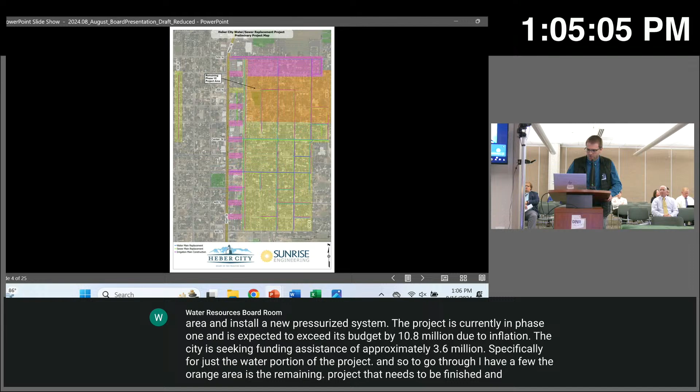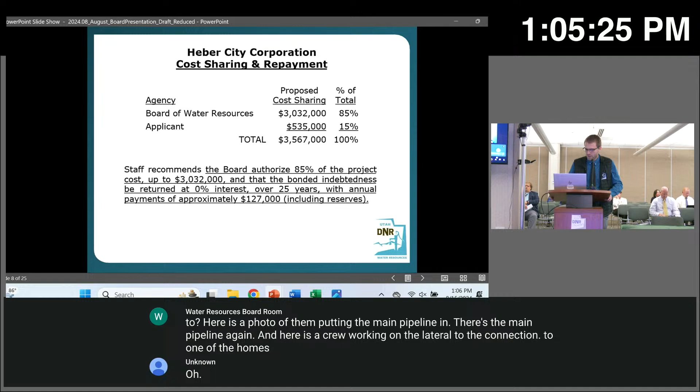And so the staff recommends the board authorize 85% of the project cost, up to $3,032,000, and that the bonded indebtedness be returned at 0% interest over 25 years with annual payments of approximately $127,000, including reserves. That is staff's report.

Does the applicant wish to add anything to the presentation? No, I don't believe so, I think I covered all of it. Yeah, we just had, due to inflation during COVID and the supply chain issues, it kind of drove our project costs up higher than anticipated than what our original funding package had funds for. And so we're just trying to seek out some additional funding to complete the project in its original scope.

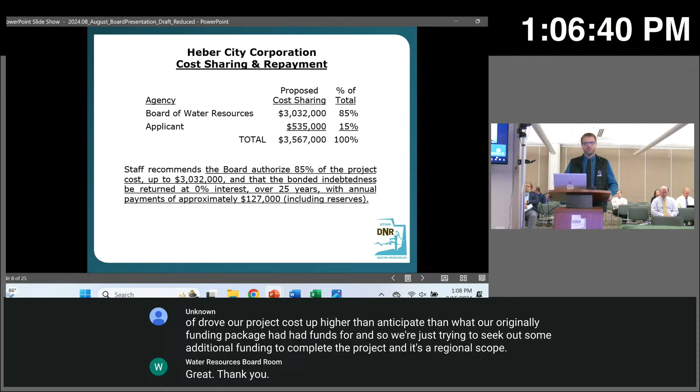Great, thank you. Is there any questions from the board then? Seeing none, I'll look for a motion. Mr. Chairman, I move that the board authorize 85% of the project cost up to $3,032,000, and that the bonded indebtedness be returned at 0% interest over 25 years with annual payments of approximately $127,000, including reserves. We have a motion, is there a second? Dana, thank you. All in favor? Aye. Any opposed? Passes unanimously. Thank you.

Okay, moving down, we move into committal of funds. RC 068, Twin Creeks Special Service District, Lindsay Reservoir. Good afternoon, board members. Max, do we have Max Covey online? I am, I'm here. Welcome. Thank you. All right, so for Twin Creeks Special Service District, in relation to Bennett Lindsay Dam, or Lindsay Dam.

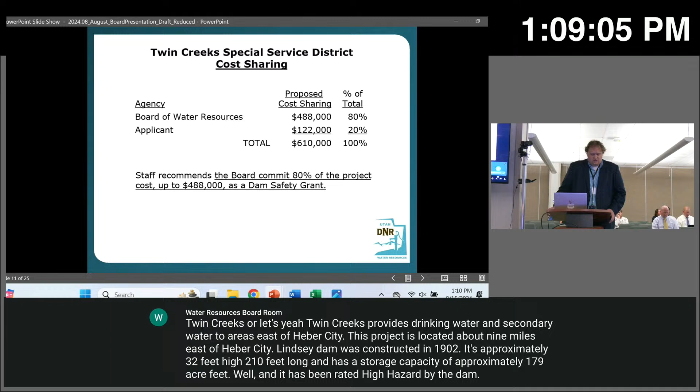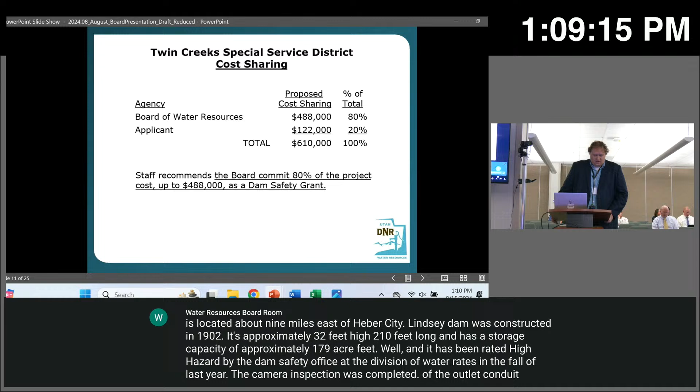In the fall of last year, a camera inspection was completed of the outlet conduit, which indicated integrity issues with the outlet that need urgent repair. The Office of Dam Safety agreed to allow the district to store water during the winter to use this year, as long as the district agrees to fix it.

There are 3 sections that have been added over the years. They're all 10-inch. One is a concrete pipe with extensive cracking and a deformed oval shape, which is of maybe greatest concern. Then there's some box structure and some CMP.

The proposed project includes replacing that by excavating 4,000 cubic yards and then installing a 24-inch concrete encased HDPE pipe. A new sluice control gate will also be installed, as well as an outlet structure with a trash rack.

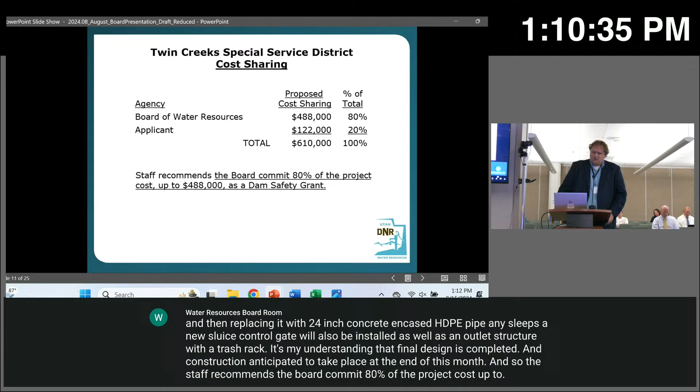It's my understanding that final design is completed and construction is anticipated to take place at the end of this month. Staff recommends the board commit 80% of the project cost, up to $488,000, as a dam safety grant. That is staff's report.

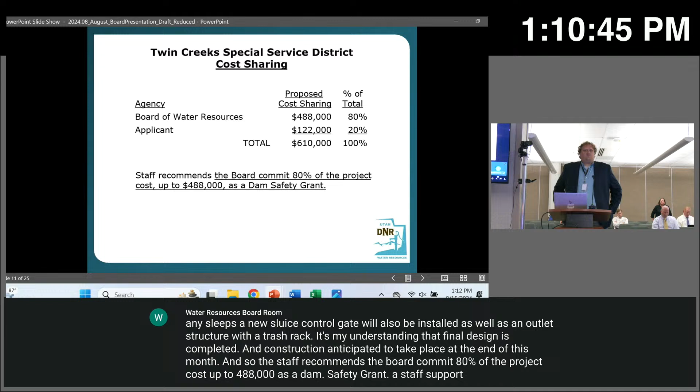Thank you, Ethan. Does the applicant wish to add anything to the presentation?

Thank you, Mike. I'd like to jump in and express my appreciation to Dam Safety and Egbert, and Matt and his group, and Ethan and Tom, for helping me push this through. This is of great importance, as mentioned earlier, as this is the culinary and secondary supply for a lot of our customers in this area. Getting this repaired this season to store water this winter for next year's use is very critical. Other than that, I just appreciate your time.

Thank you. Are there any questions from the board? Max, I do have a question. This is a grant, so you'll be required to provide 20%. How are you providing that—through reserves, rates, or participants? That's going to come from our reserve repair and replacement fund. Roughly about $122,000 is what we're anticipating, and we do have that budgeted and available for use on this project. Okay, great. Thank you.

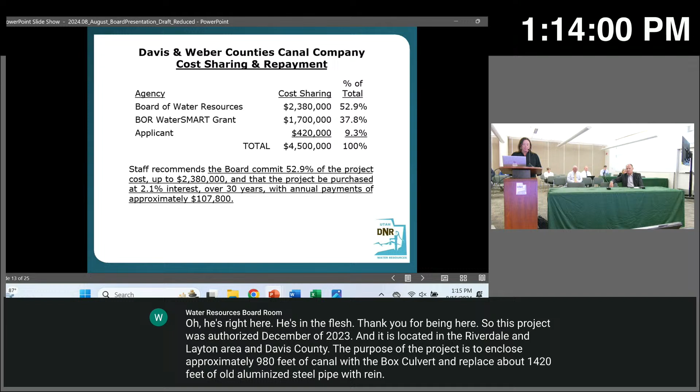It is anticipated that construction will start after the irrigation season ends in October. Staff recommends the board commit 52.9% of the project cost, up to $2,380,000, and that the project be purchased at 2.1% interest over 30 years with annual payments of approximately $107,800. That is staff's report.

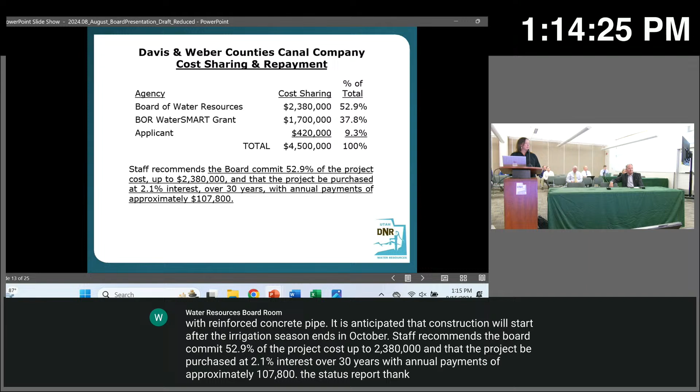Thank you. Scott, do you have anything to add to the presentation? I'm not sure what to add, other than positive things—generally, yes, help. Totally.

We really appreciate the board and the Division of Water Resources helping on, I don't know how many projects it's been with Davis and Weber County's Canal, but it's been dozens, at least. I know you've held the water rights for the company for probably several decades because of the many loans we've gotten from the division. We just appreciate the ongoing support. This is just another great project in a series of projects we still have to do to improve the canal, which is really the lifeblood of the company. So appreciate it. Thank you.

Thank you. Are there any questions of the board?

Kyle? Not a question, Mr. Chairman, but just a comment—it's good to see Scott here today. We generally see Rick, I think. Right, but he's at a wedding, a family wedding, I believe, today, so he has a legitimate excuse for not being here. But yeah, this is just another part of your ongoing capital improvements project list that you're working on. Yes, definitely it is. Thank you.

If there are no further questions, I'm looking for a motion. Mr. Chairman, again, Kyle Stevens, I'll make that motion: that the board commit 52.9% of the project cost, up to $2,380,000, and that the project be purchased at 2.1% interest over 30 years with annual payments of approximately $107,800.

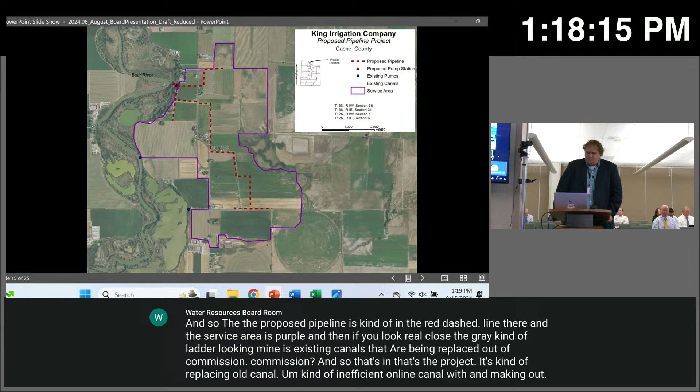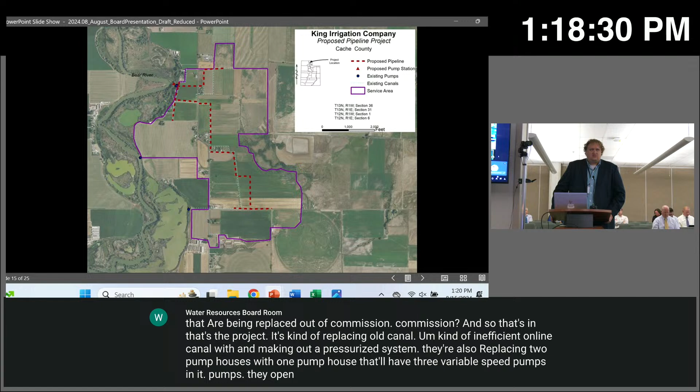They're also replacing 2 pump houses with 1 pump house that'll have 3 variable speed pumps in it. They opened bids this morning, and they're looking for a contractor, hoping to get started as soon as they can.

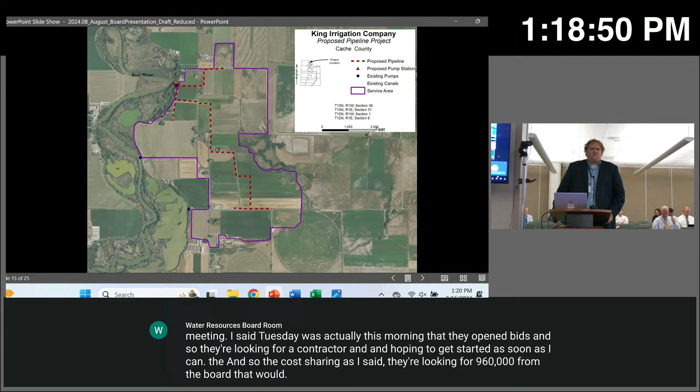The cost sharing: they're looking for $960,000 from the board. That would be 28.4% of the total project cost. The board previously authorized 28.4% of the project, up to $960,000, to be purchased at 0% interest over approximately 18 years.

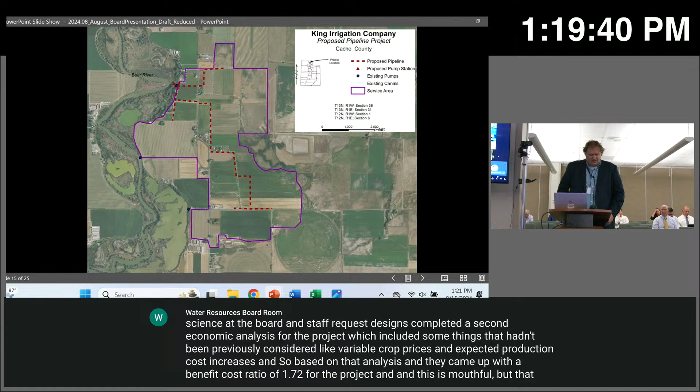But then at the board and staff request, Zions completed a second economic analysis for the project, which included some things that hadn't been previously considered, like variable crop prices and expected production cost increases. Based on that analysis, they came up with a benefit cost ratio of 1.72 for the project, and an estimated annual net increased crop income of $367,000. From that, figuring in some of their other costs, we figured a net annual benefit of $86,500, and that times the board cost share put them at a payment that would take too long to repay based on this fund. So we gave them the maximum amount of years we could, at 25 years.

So there's the cost sharing with the $1 million WaterSMART grant and the $1.25 million UDAF grant, and then the board cost share and the applicant's 5% share. That leads me to the staff recommendation: staff recommends that the board commit 28.4% of the project cost, up to $960,000, and that the project be purchased at 0% interest over 25 years with annual payments of approximately $38,400. That is staff's report.

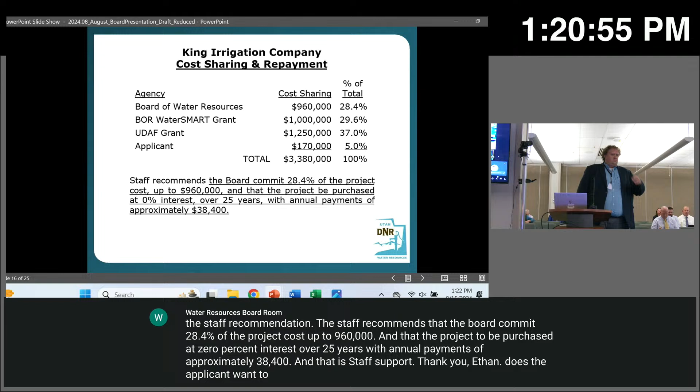Thank you, Ethan. Does the applicant want to add anything to the presentation? I think that sounds good. Very good. Are there any questions from the board?

Mr. Chairman, a question. Could you bring the picture of the map back up? It looks like the existing pump stations were just on the outside edges of the service area—one here, and one here—but a new one. So will the existing pump stations be replaced with the new pump station, or will the other ones that are still there still be used? Yes, those pump stations will be completely demoed and replaced with the new upgraded pump station.

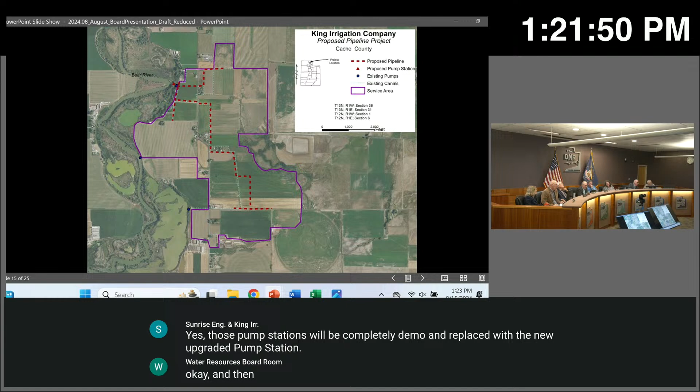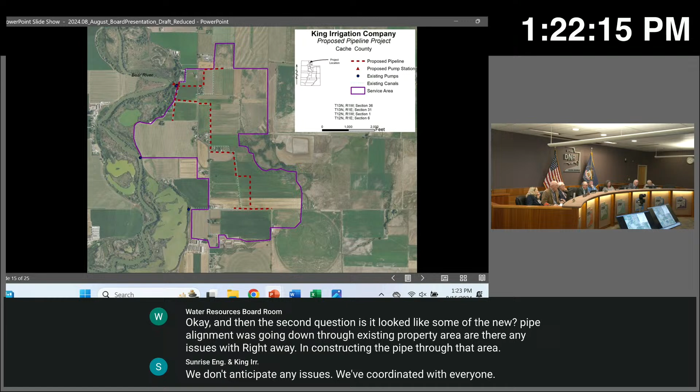Okay, and then the second question: it looked like some of the new pipe alignment was going down through existing property area. Are there any issues with right-of-way in constructing a pipe through that area? We don't anticipate any issues. We've coordinated with everyone, and we're working. All the property owners are the farmers who will actually benefit from this project, so they're all very excited for this project. Okay, thank you.

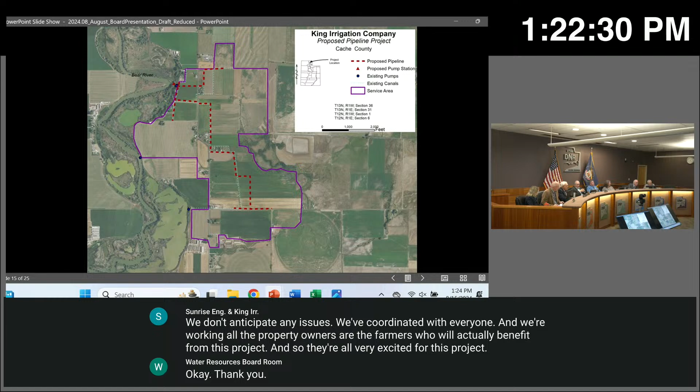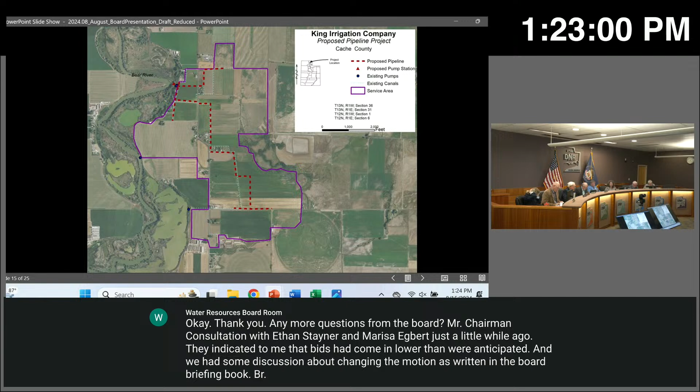Any more questions from the board? Mr. Chairman, in consultation with Ethan Stayner and Marisa Egbert just a little while ago, they indicated to me that bids had come in lower than anticipated, and we had some discussion about changing the motion as written in the board briefing book. What we decided is I will read the motion as stated, and then when the project is completed, we can adjust the amounts down, not up. If the project participants want to do other work—at least what we've done in the past—if there are additional funds at the end, you might want to adjust some of your project within the upper limits of that amount of money. But for today, I will read the motion to not reflect these lower bids you received today, but what the board book describes.

Very good, then we're looking for a motion. Mr. Chairman, I will make the motion that the board commit 28.4% of the project cost up to $960,000, and that the project be purchased at 0% interest over 25 years with annual payments of approximately $38,400.

Thank you for your motion. Is there a second? I'll second it. Seconded by Kyle. All those in favor of the motion? Aye. Any opposed? Motion carries. Thank you very much. Thank you, Ethan, and thank you, applicants, for being here.

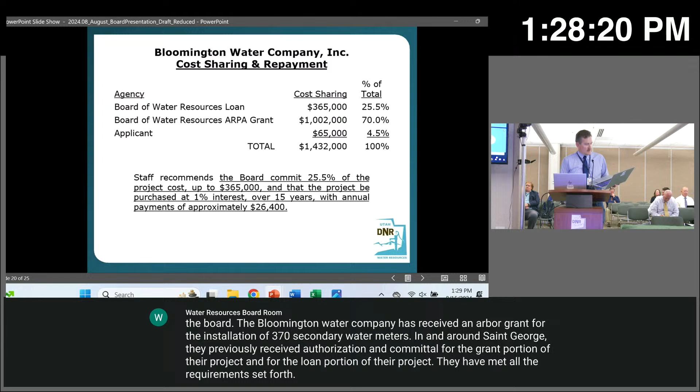Staff recommends that the board commit 25.5% of the project cost up to $365,000, and that the project be purchased at 1% interest over 15 years with annual payments of approximately $26,400. And that's staff's report.

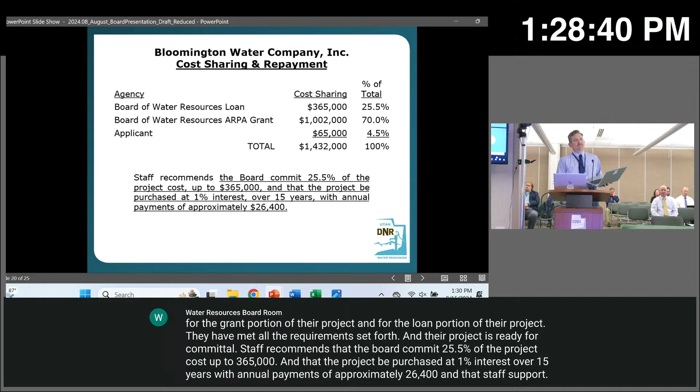Thank you. Are there any questions from the board? Seeing none, we'd entertain a motion. Mr. Chairman, Spencer Jones would like to make a motion that the board commit 25.5% of the project cost up to $365,000, and that the project be purchased at 1% interest over 15 years with annual payments of approximately $26,400. Thank you for the motion. Second by Randy. All in favor? Aye. Any opposed? Motion carries. Thank you all. Thank you, Ben.

Now we will move into special items. Ben can stay here. RM 100, Saratoga Springs City, change of scope, and we have Owen Jackson and Mark Atencio. Apologize. Thank you for being here. Okay, Ben, go ahead.

The city of Saratoga Springs came before the board in June 2023, and at that time they received authorization and committal of funds for a project to install some pipeline and to do some landscape conversion from turf grass to waterwise landscaping. They've been pursuing that project since then. However, the project became impossible due to issues with obtaining the necessary rights-of-way. And they are coming before the board today to propose an adjusted scope to their project.

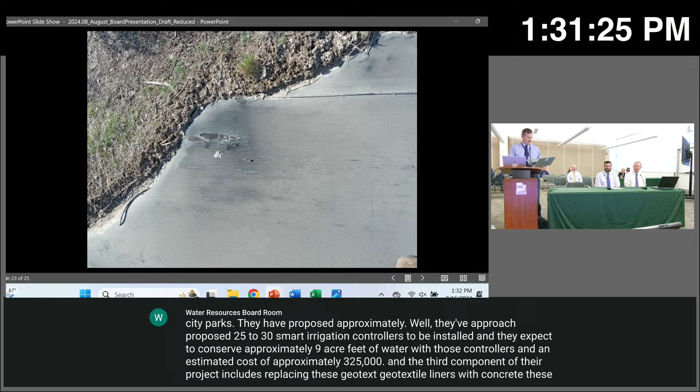They expect to conserve approximately 9 acre feet of water with those controllers at an estimated cost of approximately $325,000. The third component of their project includes replacing these geotextile liners with concrete. These are located in a couple of city ponds, and they are in a state of failure and need to be replaced. But because of the scheduling of the funding and the project, there has not been a percolation study done, so there's no estimate on water conservation here.

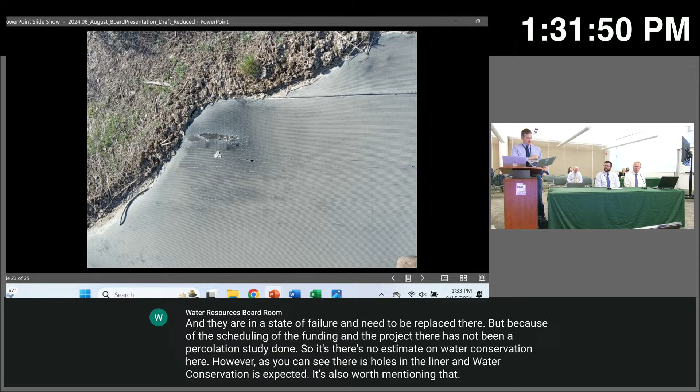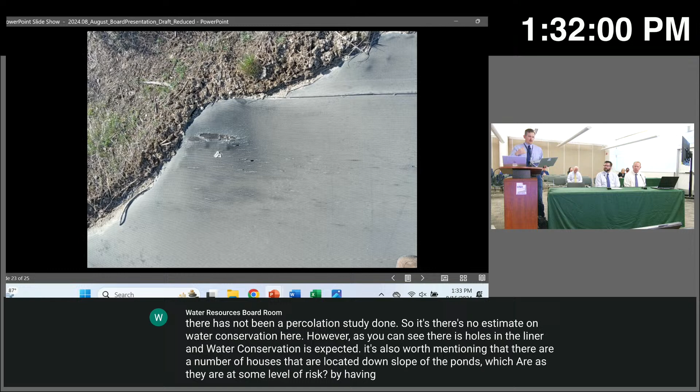However, as you can see, there are holes in the liner and water conservation is expected. It's also worth mentioning that there are a number of houses located downslope of the ponds, which are at some level of risk from water leaking through the liner. This piece of the project is expected to cost approximately $1.3 million.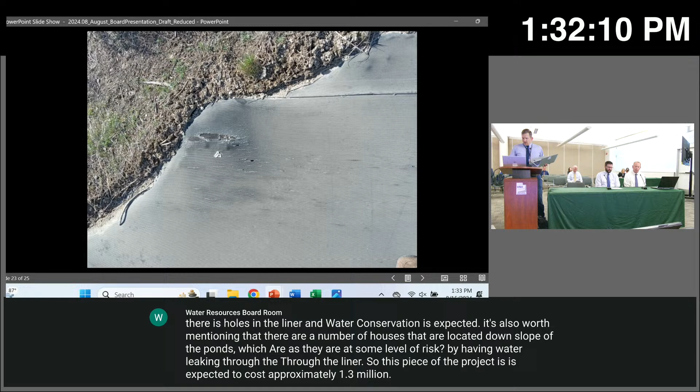And a couple more photos for your viewing pleasure, which I think we've already seen once today.

This project is slated to receive about $2 million, a separate portion of the ARPA funding, for 4 systems that were fully metered previous to May 4th, 2022. The total expected project cost is $2,626,000. Staff recommends that the board approve the change in project scope and allow the $2 million water conservation grant to be used for the new projects as requested by the applicant. That is staff's report.

Thank you, Ben. Does the applicant want to add anything to the presentation?

Just appreciate the board considering this matter and helping us do some water conservation additionally in our city. It'll be nice to get some of these ponds fixed and stop the seepage from happening, as well as the landscaping, and set a good example for our residents as well. So thank you.

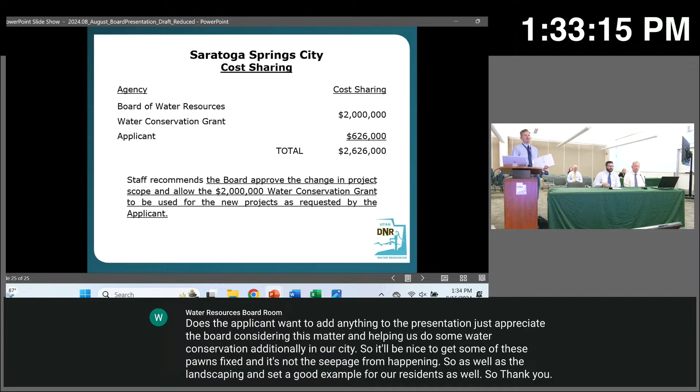Does the board have any questions for the applicant or from Ben? Kyle, I'll ask a couple there. Ben, from some of the earlier pictures you showed us of the pond liners, they were deteriorating. How long have those been in, and what was the life expectancy on those?

They've been installed for 15 to 20 years. The life expectancy is 20 years. These two are the first ponds constructed in the city. We no longer use this method. We found that they capture a lot of thermal energy, which leads to the growth of algae and water quality problems in our system, so there will be a number of benefits by replacing these.

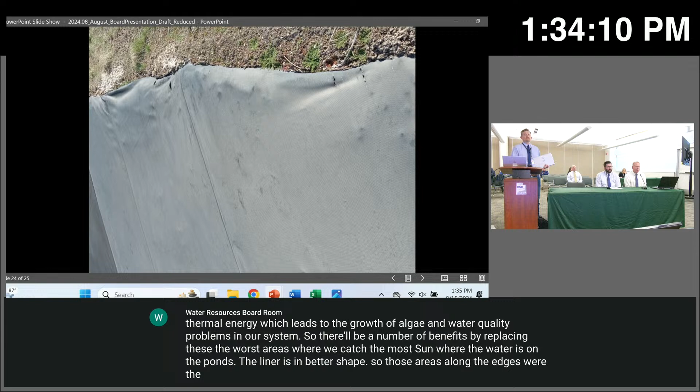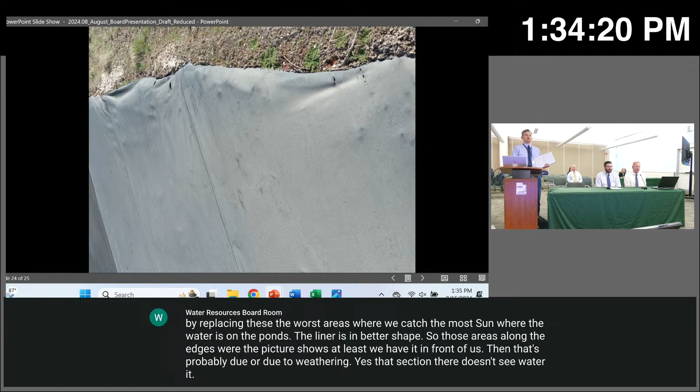The worst areas are where we catch the most sun. Where the water is on the ponds, the liner is in better shape. Those areas along the edges shown in the picture are probably due to weathering and sun exposure -- that section doesn't see water, it catches the sun. It's facing west. Okay, thank you.

Any further questions? Seeing none, looking for a motion. Mr. Chairman, I move that the board approve the change in project scope and allow the $2 million water conservation grant to be used for the new projects as requested by the applicant. Thank you, we have a motion. Brian is a second. All in favor? Aye. Aye. Any opposed? Motion carries. Thank you very much, thanks for coming to the meeting. Appreciate having you here. Thank you, Ben.

Okay, next in line we have some withdrawals. Is Marisa going to do this? Who's going to present these? I don't think so -- we've already been over these, so we know them.

Do we have a motion to withdraw RL 587 Millville City and RM 099 Ashley Central Irrigation Company? Mr. Chairman, I will move on RL 587 that the project be withdrawn from further consideration by the board. Second. We have a motion and a second. All in favor? Aye. Aye. Any opposed? Motion carries.

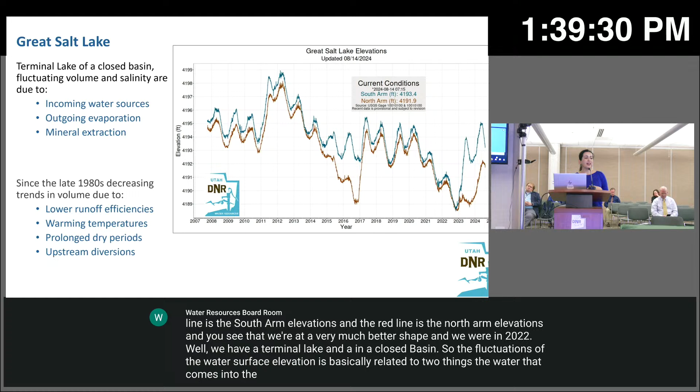We have a terminal lake in a closed basin, so the fluctuations of the water surface elevation are basically related to two things: the water that comes into the lake and the water that goes out. The water that goes out is mostly evaporation, and the other part is some diversions for mineral extraction.

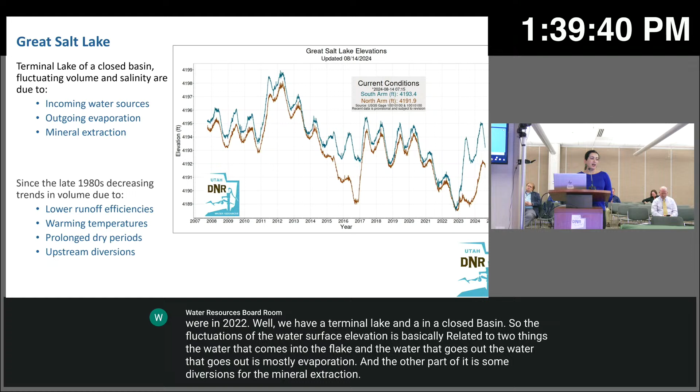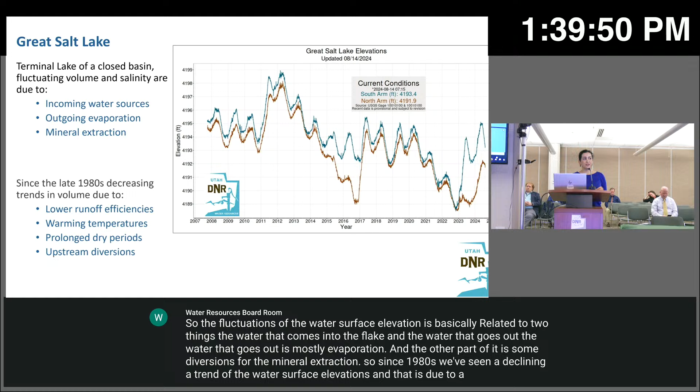Since the 1980s, we've seen a declining trend of the water surface elevations, and that is due to a combination of different factors such as lower runoff efficiencies, warming temperatures, prolonged dry periods, and upstream diversions. All of these affect the fluctuations of water surface that you see here.

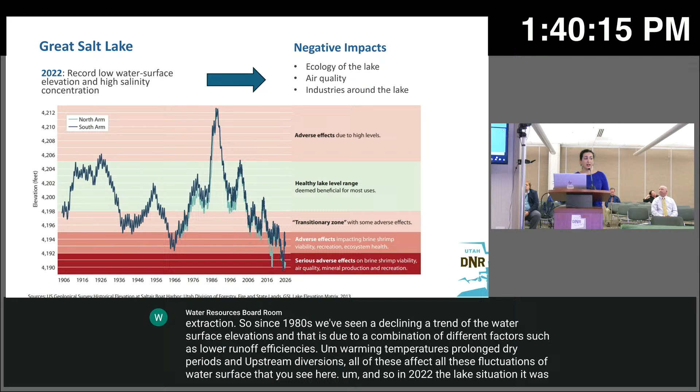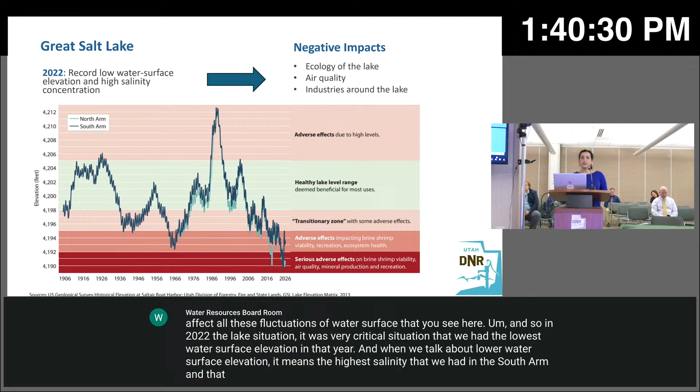In 2022, the lake situation was very critical. We had the lowest water surface elevation that year. And when we talk about lower water surface elevation, it means the highest salinity that we had in the south arm. Both of those factors affect the ecology of the lake, the air quality, and the industries around the lake, all with very negative impacts.

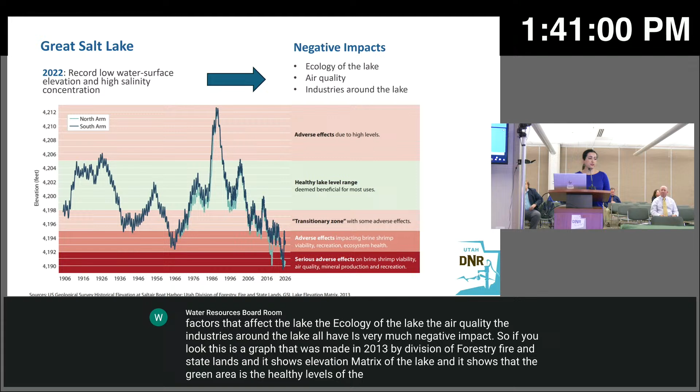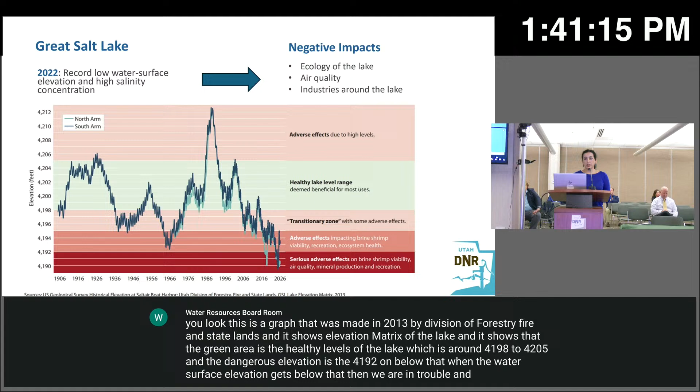This is a graph made in 2013 by the Division of Forestry, Fire, and State Lands, and it shows an elevation matrix of the lake. The green area is the healthy levels of the lake, which is around 4198 to 4205. The dangerous elevation is 4192 and below. When the water surface elevation gets below that, then we are in trouble, and the brine shrimp industry, the mineral companies, air quality—a lot of issues rise up.

Now we want to look at this at a bigger scale. In the Great Salt Lake Basin, the water that comes into the basin and is used by the users, both agriculture and municipal, and the lake, we all share the same water resource, and it starts up in the mountains. When the snowpacks melt, it goes into the groundwater and the rivers, gets to the basin, gets used by the water right holders and different users, and then whatever is left gets to the lake.

Here we want to mention the major inflows to the lake. There are three big rivers that go into the lake: Bear River, Weber River, and Jordan River, with Bear River around 41%, Jordan River around 14%, and Weber 9%. The other biggest inflow to the lake is direct precipitation, which is around 32%.

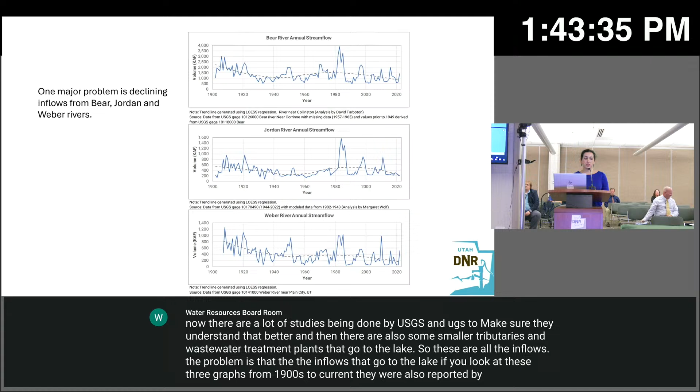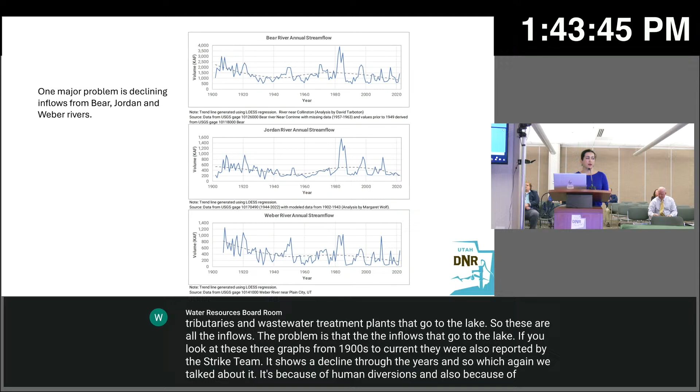It shows a decline through the years, and as we talked about, it's because of human diversions and also because of the trends of climate and climate factors.

Since the beginning of the 1990s, we've had this water budget model that was developed by the Division of Water Resources in order to better understand the water balance in the state, and we've been improving this model along the years. This is a model that is on an annual basis.

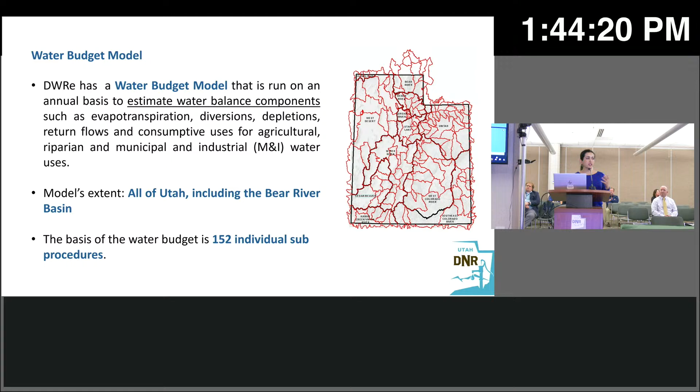It considers estimates of different water balance components such as evapotranspiration, consumptive use, diversions, depletions, return flows for different users. It does this based on getting an extensive amount of input data from all different sources, such as Division of Water Rights, USGS, USBR, and all other places where there is water data available for the state.

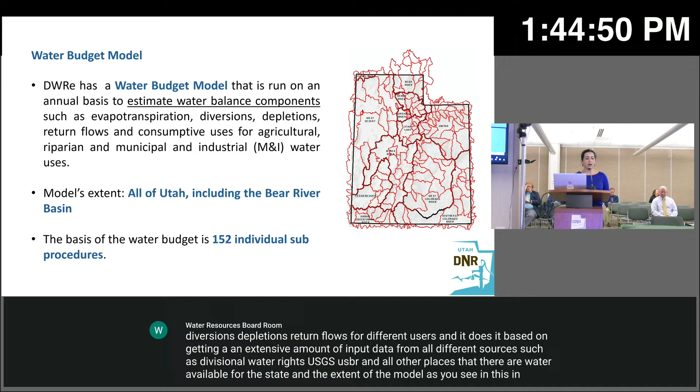The extent of the model, as you see in this map, covers the whole state as well as the Bear River Basin. The way it does it, it divides the state into 152 sub-areas, and it has a specific procedure and code for each sub-basin because each sub-basin is different. Then it does the calculations.

On average, the evaporation is estimated to be around 2.2 million acre-feet from the Great Salt Lake itself, and that's a big number. If you look at all the different numbers and depletions that we see in this basin, 2 million is a big number.

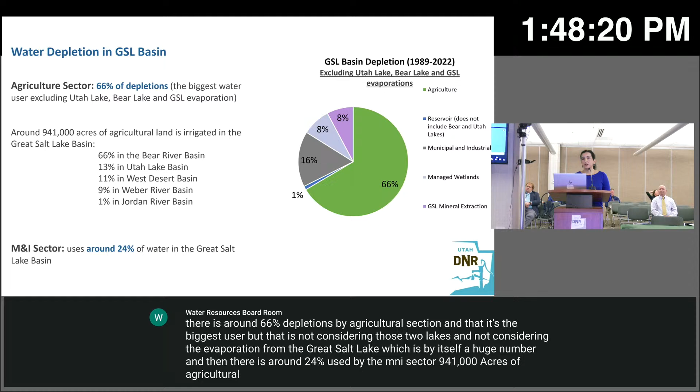And then there is around 24% used by the M&I sector. There's 941,000 acres of agricultural area, and most of it is in the Bear River area, of course.

We know there are a lot of different challenges we have, and no one solution can fix this. We are all in this together. It's a big basin, it has a lot of different users, and one of them is the Great Salt Lake. It can be done only by collaboration, continued innovations, and with all the stakeholders involved.

There have already been a lot of significant steps, research and work done during recent years, and it's ongoing. I'll just mention three of these here. One is the Great Salt Lake Strategic Plan developed by the Great Salt Lake Commissioner's Office to provide a coordinated path forward for the Great Salt Lake.

And then there is the Great Salt Lake Basin Integrated Plan that you've heard before from our team here at the Division of Water Resources. We are working on this currently. It's significant modeling work in collaboration with different federal and state agencies and other stakeholders, and it's supposed to help us improve the models we have, because the models are only good if we have great input data. If not, it's not as accurate.

And we know there are gaps in our understanding and in the models that we have. And the only way to fill those gaps and make it better, and make us understand this system better, is through this modeling effort that we're doing.

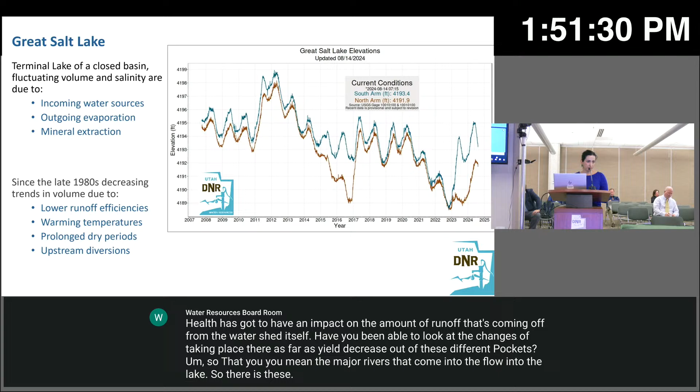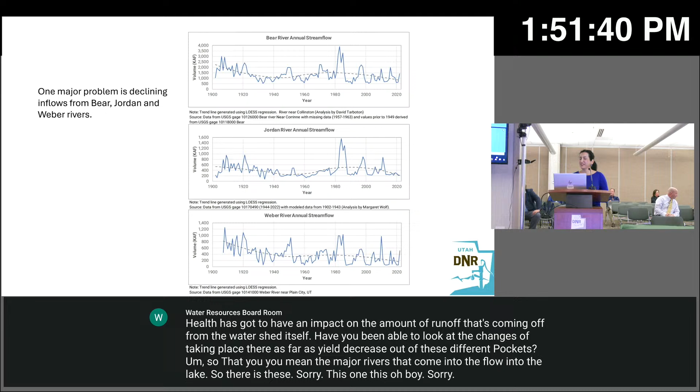You mean the major rivers that come into the main lake, watershed? So there is these... sorry... this one, oh boy, sorry, this one. That shows the three major rivers, and it already shows that all the runoff that comes, it's decreasing from the 1900s to now.

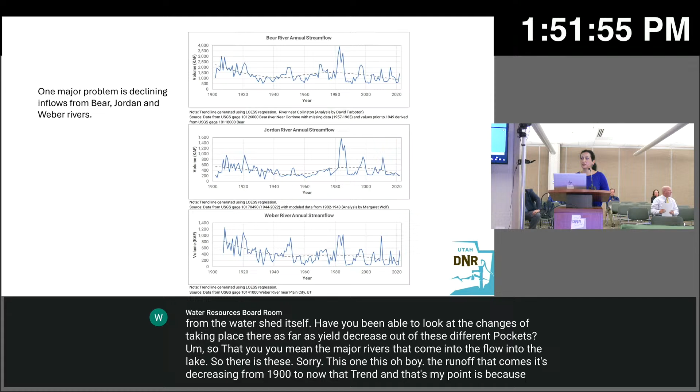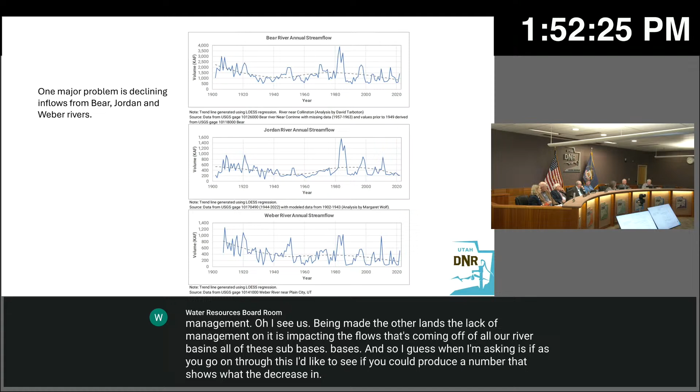The trend - and that's my point, is because of the lack of watershed management. Oh, I see - forests being managed, the other lands, the lack of management on it is impacting the flows that's coming off of all our river basins, all of these sub-basins. And so I guess what I'm asking is, as you go on through this, I'd like to see if you could produce a number that shows what the decrease in those yields from these different sub-basins is due to the lack of watershed management.

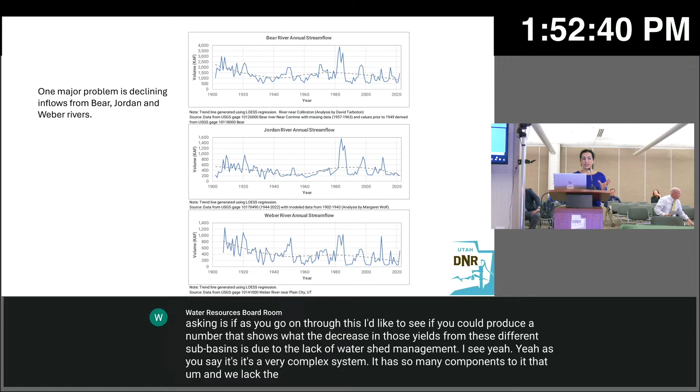I see. Yeah, as you say, it's a very complex system. It has so many components to it, and we lack the understanding of some of these and how it impacts the whole system. Hopefully in the next few years we're going to have much better understanding of what happens and why. So yeah, I appreciate your input on this.

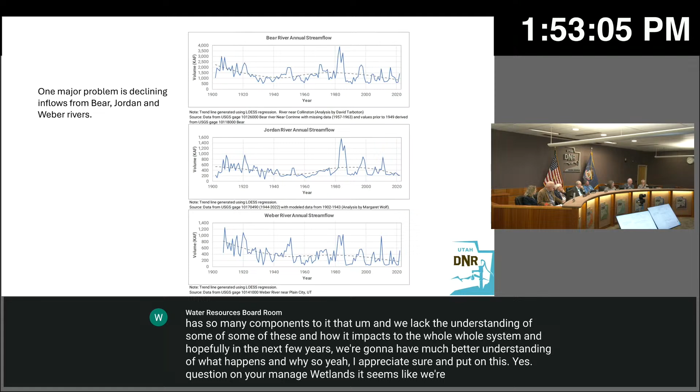Yes. Can I ask a question on your managed wetlands? It seems like we're in different places. One of the graphs you presented shows the different uses, shows managed wetlands overtaking municipal and industrial. I don't see that in your riparian description on that graph. What's the difference there?

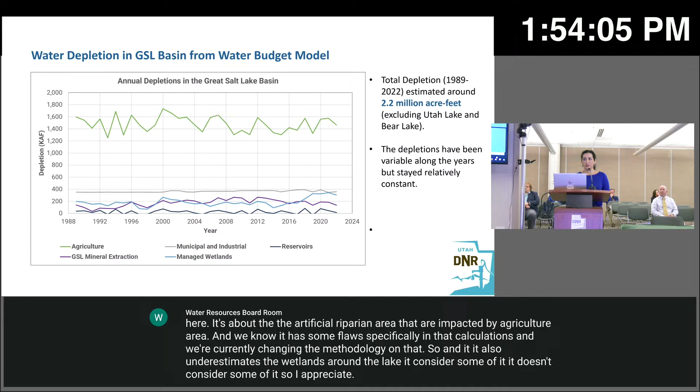It is from the same data, but just keep in mind that this riparian or managed wetlands here, it's about the artificial riparian area that are impacted by agricultural area. And we know it has some flaws, specifically in that calculation, and we're currently changing the methodology on that. It also underestimates the wetlands around the lake - it considers some of it, it doesn't consider some of it, so. No, I appreciate that, I just noticed some of those things. No, of course, yeah, but yeah.

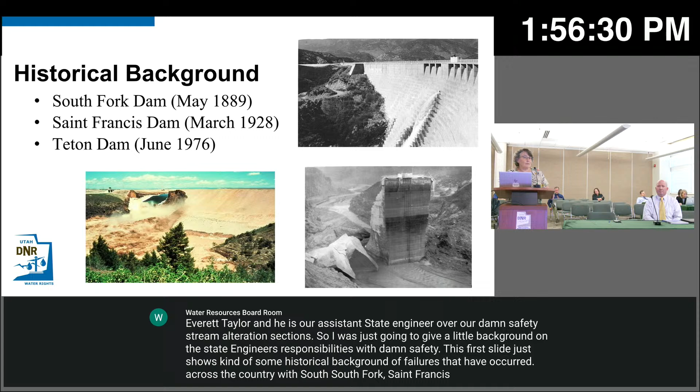So I was just gonna give a little background on the State Engineer's responsibilities with dam safety. This first slide shows some historical background of failures that have occurred across the country with South Fork, St. Francis, and the Teton Dams. I'm one of those old enough to remember these, so I've been around a little while.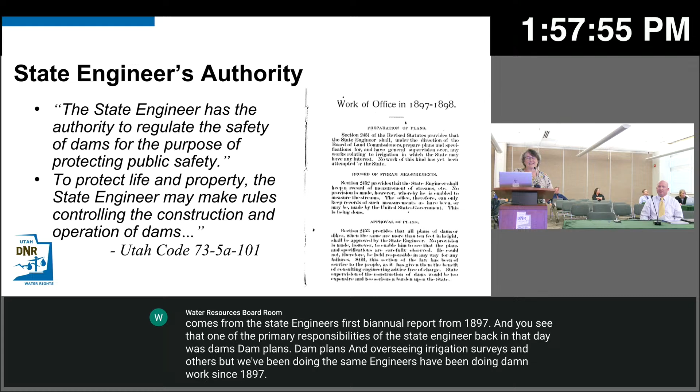You see that one of the primary responsibilities of the state engineer back in that day was dam plans, and overseeing irrigation surveys and others. The state engineers have been doing dam work since 1897. I love saying that. Anyway, with the state engineer's authority, I'm gonna turn it over to Everett to talk about the current program that we do today. So Everett.

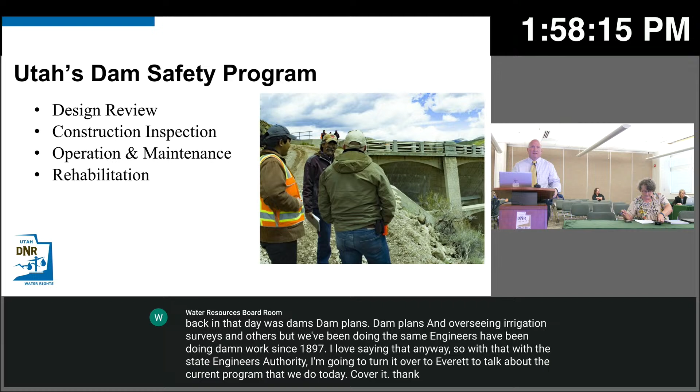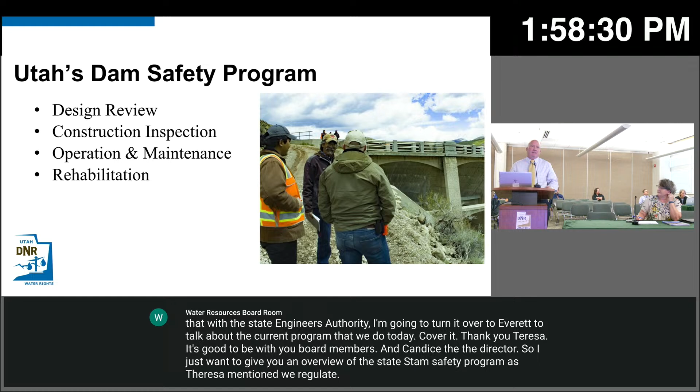Thank you, Teresa. It's good to be with you, board members, and Candice, the director. I just want to give you an overview of the state's dam safety program. As Teresa mentioned, we regulate dam safety in the state of Utah to protect downstream life and property. To accomplish that, we focus on four areas. I want to talk about each of them briefly.

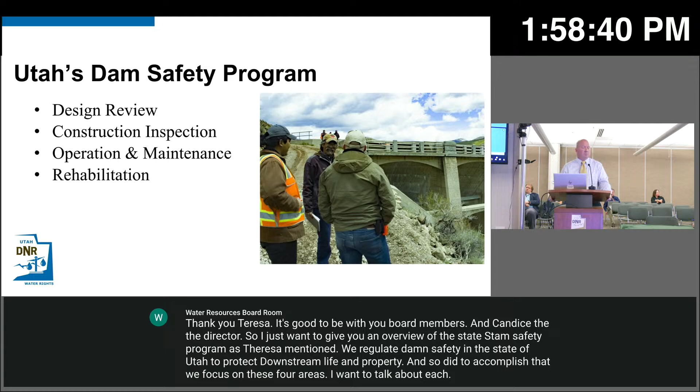The first is design of dams. Utah Code 73-5A-201 requires that no person may construct, enlarge, repair, alter, remove, or abandon any dam without first obtaining approval from the state engineer. Whenever a dam is to be constructed, or if an existing dam is going to be modified or repaired, the owner or their engineer needs to submit plans to our office for review and approval. Typically, these documents will consist of any design reports created, a set of design drawings, and technical specifications. We're given 90 days to review those and then issue comment back to the engineer or owner.

Once those comments have been addressed to the satisfaction of the state engineer, we will then issue an approval for that project. Once they've received approval from our office and obtained any other necessary approvals, they can move to construction. Utah Code 73-5A-301 instructs the state engineer's office to make periodic inspections of the work to ensure it's in compliance with the approved drawings and specifications.

So we perform routine construction inspections, doing those at least monthly for all ongoing construction projects, and more frequently if warranted. There are 3 formal inspections stated in our approvals: a foundation inspection, once the foundation has been cleared and prepared to receive fill, to ensure it's ready; then we inspect the outlet conduits prior to any concrete encasement and backfilling; and we complete a final inspection when construction is completed. We also monitor the dams through the initial filling of the reservoir to make sure they function as designed, and that any issues are addressed.

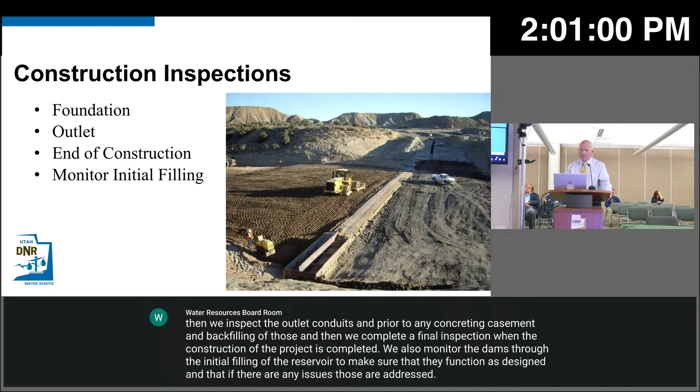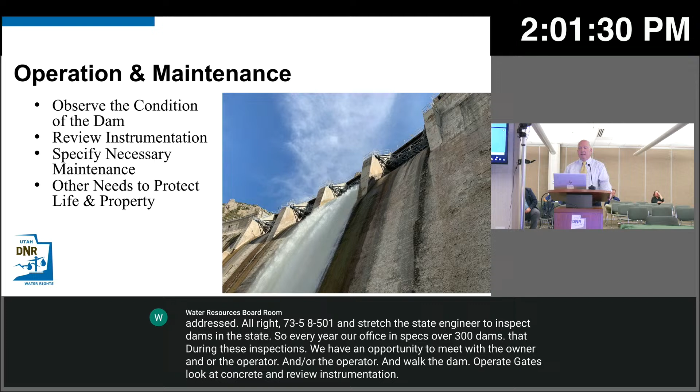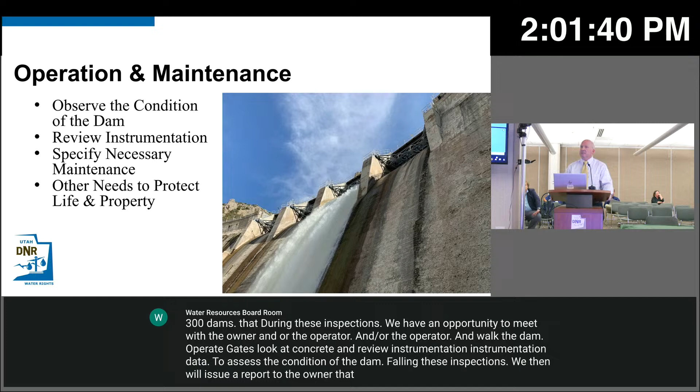73-5A-501 instructs the state engineer to inspect dams in the state. So every year our office inspects over 300 dams. During these inspections, we meet with the owner and or operator, walk the dam, operate gates, look at concrete, and review instrumentation data to assess the condition of the dam. Following these inspections, we issue a report to the owner that identifies necessary maintenance for them to complete prior to the next inspection.

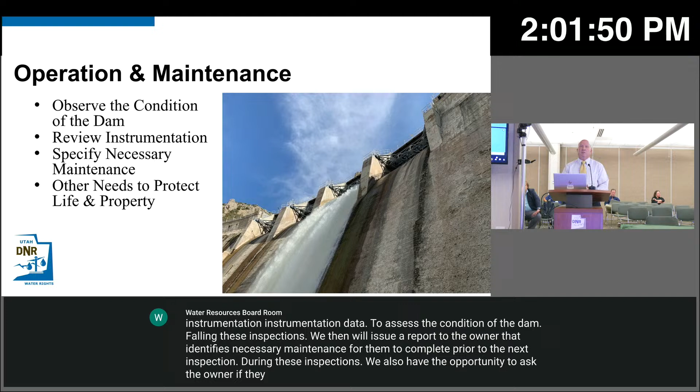During these inspections, we also have the opportunity to ask the owner if they've reviewed their emergency action plans, and then request any updates be made to those plans and copies of the revisions sent to interested parties.

This is really the part you may be most interested in as you make motions and decisions on these. When the law was amended in 1991, the legislature recognized the need to rehabilitate existing dams and provided a grant program to help rehabilitate high hazard dams in the state, outlined in 73-5A-502. The state engineer was required to evaluate existing high hazard dams and prioritize them for rehabilitation. Most of those evaluations were completed in the 1990s and early 2000s, and the state engineer's office created a prioritized listing of those dams.

Sometimes dams are added to that list when their hazard increases to a high hazard. That generally occurs when development encroaches onto the dam. So that list is not static, it continues to grow.

In that same law, it indicates that the state engineer cannot require an owner to rehabilitate their dam to bring it into compliance with minimum standards unless a grant to pay for at least 80% of the cost is made available through the Board of Water Resources. And then there's 73-10-8, the code that gives Water Resources the direction to provide that grant.

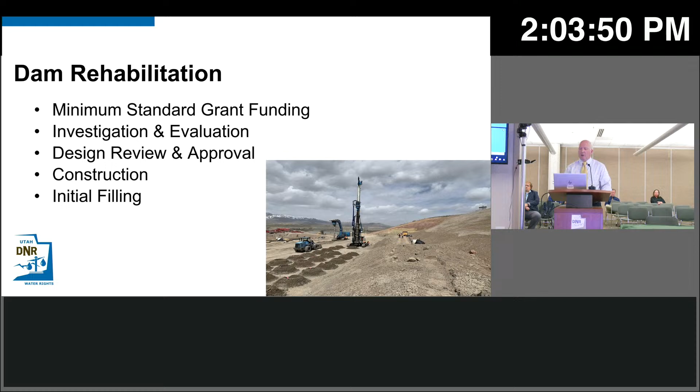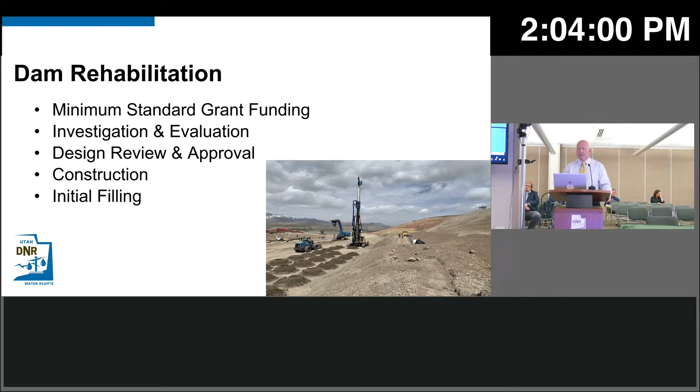So while our office maintains the rehabilitation priority listing, we recognize that Water Resources administers the grant funding. Our two offices cooperate to identify the priority projects and availability of funding to rehabilitate high hazard dams in the state. Currently, we have 17 existing dams in some phase of rehabilitation design or construction.

I wanted to let you know what we evaluate those dams on as we pursue upgrading or rehabilitating them to meet minimum design standards. These 5 areas are those that we use, and then we ensure that the state's minimum design standards in those areas will be met when the project is complete.

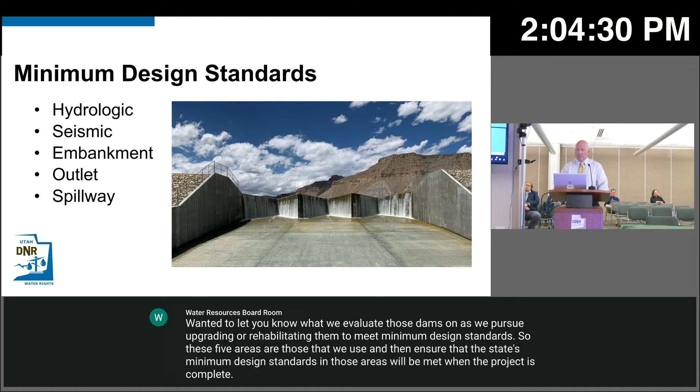And I want to talk a little bit about funding. We recognize the benefit of the state-run grant program to rehabilitate high-hazard dams and appreciate our relationship with the Division of Water Resources, who administers those funds. In addition to the state-run grant program, in cooperation with the Division of Water Resources, we have applied for funding through FEMA's High Hazard Potential Dam Grant program.

We were allocated, as we completed part 1 of that application process, $7.2 million, and we are currently working to complete part 2 of the application process to secure that funding to help rehabilitate dams in the state. In addition to pursuing that FEMA grant fund, we work with the NRCS in a cooperative relationship through their PL 566 watershed funding program.

That usually provides 65% of funds to rehabilitate a dam from the NRCS, and then the state and the owner contribute the remaining 35%. That is broken usually on an 80-20 or 90-10 split.

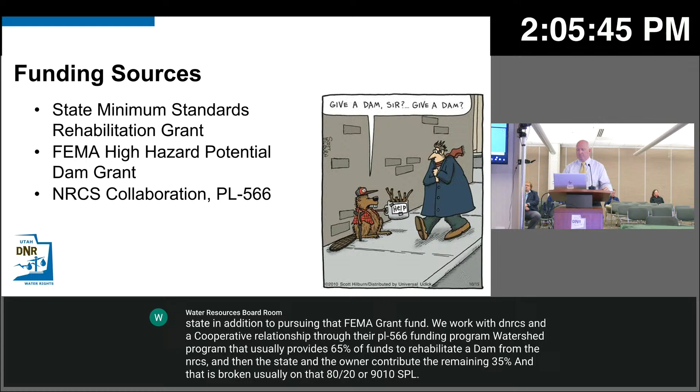And that is the end of my presentation. Any questions? Go ahead, Dana.

So, how many dams are on the list that need to be fixed that there isn't money for? Like, we just had one today, Twin Creeks for Lindsay. Yeah, Dam, Lindsay Bennett. And the date in here was 2023. Did Lindsay jump ahead of people who have less bad issues to get here, or did they literally start the process as soon as it was identified and get here in a normal time frame, or did they jump ahead, I guess is my question.

Yeah, so what happened with Lindsay Bennett is there was a gate issue, as they expressed earlier, and we allowed them to store water into this year and then required that gate to be fixed. As we seek to distribute these fundings and be efficient in that distribution, if we have a larger project that doesn't use all of the funding available and we have a smaller amount, we try to find a smaller project that could receive that funding, and that's the case of Lindsay Bennett. I believe it was a few hundred thousand dollars, and so we had that and were able to get those. The overall objective is to get these rehabilitated as quickly as possible, pending availability of funds.